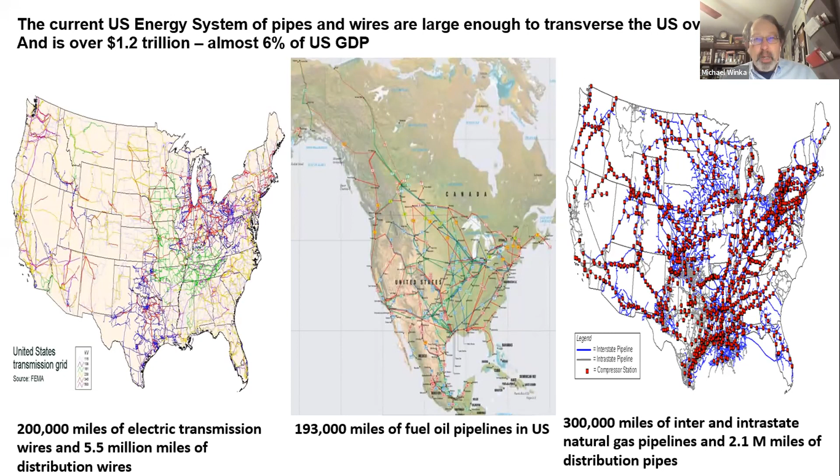So most people think when you're talking about an industry that size, that has so much inertia and resistance to change, that only government and only industry can affect that change. And yes, governments can do a lot. They can set the policy, they can set the incentives. Industry can go out and build those large clean energy power plants. Governments can permit them, and industries can develop those power plants.

But there is a real partnership that has to happen between you as the consumer and user of these levers and government. The more of these levers you pick up and use, the more the ability of the government to accelerate those policy levers. And I'll give you an example of how that happens.

The Renewable Portfolio Standard, when the RPS came into place in 2000, was 0.25%, and it increased to 4% by 2012. BPU in 2003 doubled that, and then in 2006, by regulation, it increased it to 20%. And then the legislature came along and increased it to 50% by 2030. That's because people were using clean, green energy and the RPS, and the government was then able to extend that policy. That's how these things happen in partnership.

So you have to pick up these levers. I'm not saying that you have to run faster to solve all these greenhouse gas mitigation issues, but it is this partnership and this give and take between government and consumers.

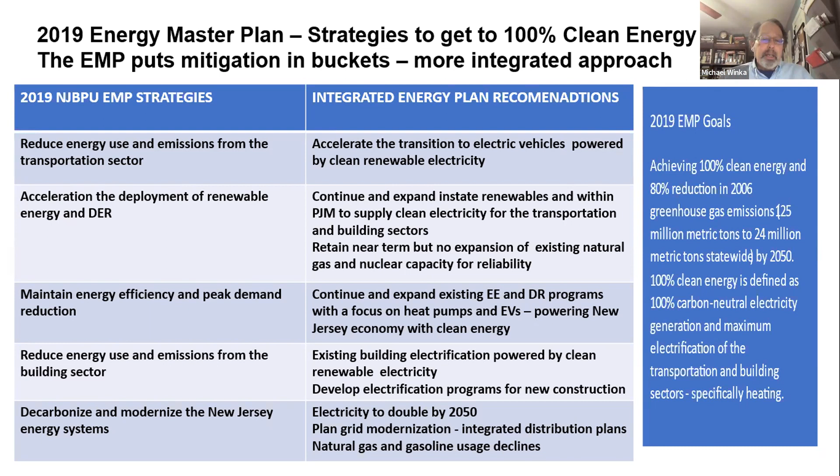The integrated energy plan structure is to say, we're going to reduce our emissions from the transportation sector by advancing electric vehicles powered by clean renewable energy. We're going to reduce our emissions from the building sector by electrifying buildings powered by clean renewable energy. We're going to increase renewable energy so we can power the transportation and building sectors. And we're going to decarbonize and modernize the grid by increasing and doubling the electricity and reducing natural gas and gasoline. So it's that integration of those strategies that really is at play here.

And you can see this in the summary of the recommendations of the modeling by the Rocky Mountain Institute in the Energy Master Plan. You can get to those goals that are set in the Energy Master Plan of about 100% clean energy and 80% reduction by 2050 with existing technologies. You can do that at a relatively small cost. There is a cost, but that's offset by significant benefits across the board.

The existing policies that are in place, those existing policies are in the Clean Energy Act of 2018, will get you to a good start, but you're going to have to advance those policies as you go along to get to the goals in the Energy Master Plan. And that least cost energy system that you build out by 2050 is going to look substantially different than the energy system that you have today.

And that's really the resistance that you're seeing. If you could put an end of the pipe technology on for greenhouse gases, you wouldn't have climate deniers. It is that inertia to this big change in the energy system that is driving all of these other issues on the other side. So when you apply those strategies across those sectors, you can see in the DEP Global Warming Response Act, they reduce all of those emissions across those sectors.

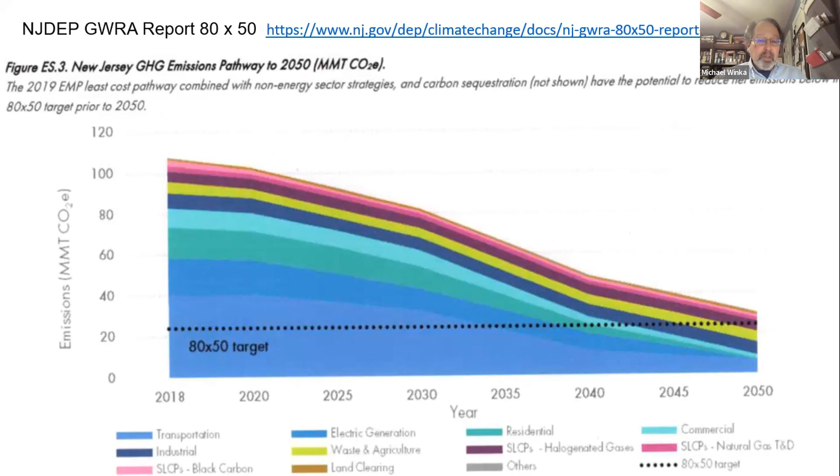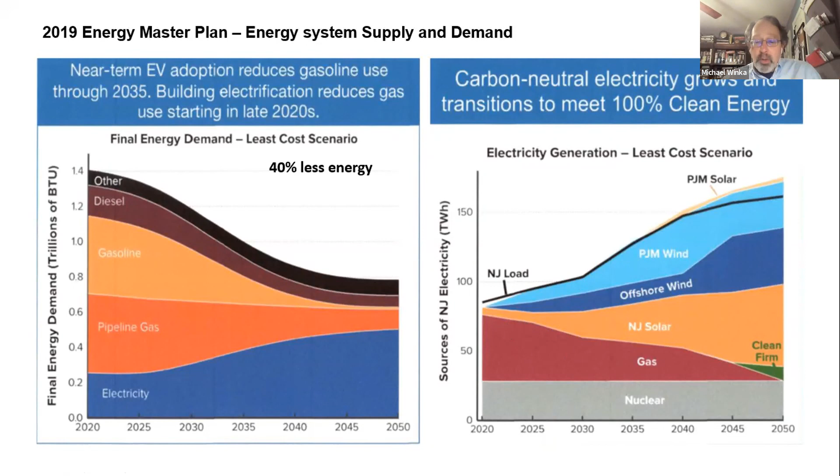But today, 50 to 60% of our electricity is generated by natural gas, 40 to 50% by nuclear. And that all depends on the time of the year and the cost over the time of the year, and about 10% by renewable. So if we're increasing strategies like building sector electrification and EVs and increasing the amount of electricity today, we're actually increasing the demand for natural gas unless we're doing that in an integrated fashion with clean, renewable electricity. So if you increase the demand for natural gas, you're just increasing the demand for somebody to come in and put in a pipeline and build another natural gas combined cycle, unless you do this in an integrated fashion.

And to look at this in terms of cost, if you look at the reference case that goes along, to meet those emissions in the Energy Master Plan is only a 0.2% increase over business as usual in energy GDP. That's a relatively small increase, and probably you go to any economist, you're not going to see a 0.2% increase in GDP affect the economy.

And in any cost benefit ratio, when you have a cost benefit greater than 1, that's cost effective, and you're going to implement those strategies. So that's the 2019 Energy Master Plan, getting to 80% reduction by 2050 and 100% clean energy. I'm going to talk a little bit about how you can look at that roadmap to get to 50% reduction by 2030. So to get to 50% reduction, you need to get to 64 million metric tons from where we were at 97 million metric tons.

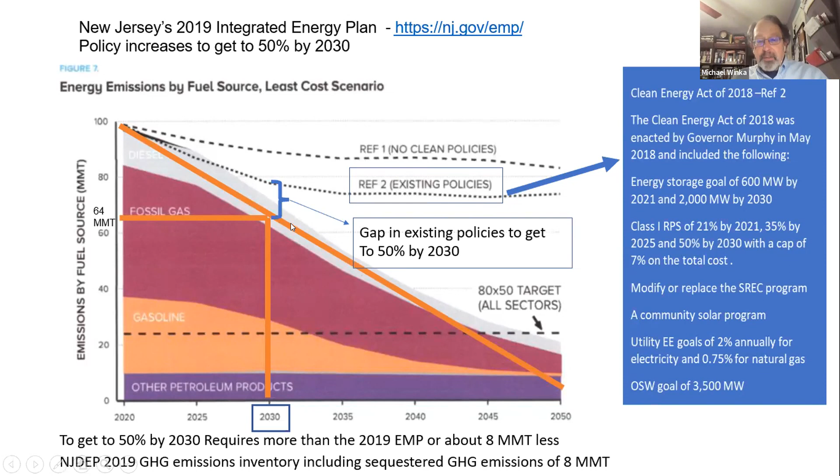But if you increase those policies to get to 50% by 2030, that's about an 8 million metric ton increase in reductions that you have to get. So it's not a big stretch to get to 50% by 2030. And here you can see this a little better in terms of the energy uses and the building sectors. You have to go from 97 million metric tons to 64 million metric tons. That's a 33 million metric ton reduction.

If you just replace the electricity with clean, renewable electricity, you only get 17 million metric tons. That's half. You have to do something in the transportation sector. You have to have half of the cars on the road, 3.5 million electric vehicles on the road, along with reducing all of that electricity to clean electricity. And those two things aren't going to happen by 2030. And you have to pick up this third lever.

These three things have to happen coordinated and integrated across the board. You have to electrify the building sectors, you have to electrify transportation, and you have to do that with clean renewable energy. And you see that in the same structure on the household side. It's just repeated what you see on the larger statewide side.

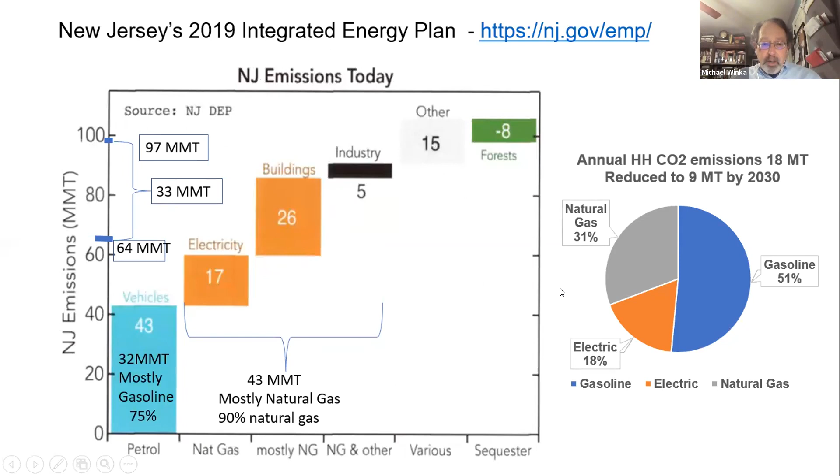So I know folks are looking for the Build Back Better plan to be passed, and folks are disappointed there's not going to be a federal carbon tax. But there are 24 states with New Jersey that have action plans to say, I'm going to get to 100% clean energy. I'm going to get to 80% by 2050. I'm going to get to carbon neutral. I'm going to get to zero, or I'm going to get to 50% by 2030. 24 states, including New Jersey, are half the states in the country.

And they don't depend on a federal carbon tax. They don't depend on a federal clean electricity standard. It would be nice to have. It would help to accelerate this. But there are greenhouse gas emission technologies that are currently available that are going to get us to that goal, even without a carbon tax. And the reason I say that is you can look at this slide. It's a little busy slide. I'll go through it in a little bit of detail, but not much.

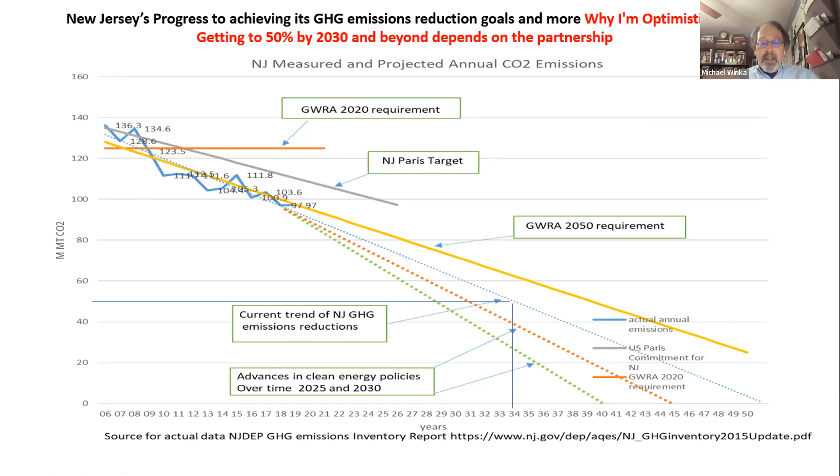And they're the same people that can't see the market forces that are changing us to clean renewable energy and electric vehicles and electric heat pumps. We are on this economic pathway and nothing is going to stop that. And I'll show you why I think that. I'm gonna pass up these two slides just to be able to get to these last couple of slides in some reasonable time. And the good thing about you picking up these levers, they're all incremental. You don't have to do everything all at once, and not everybody has to do everything all at once.

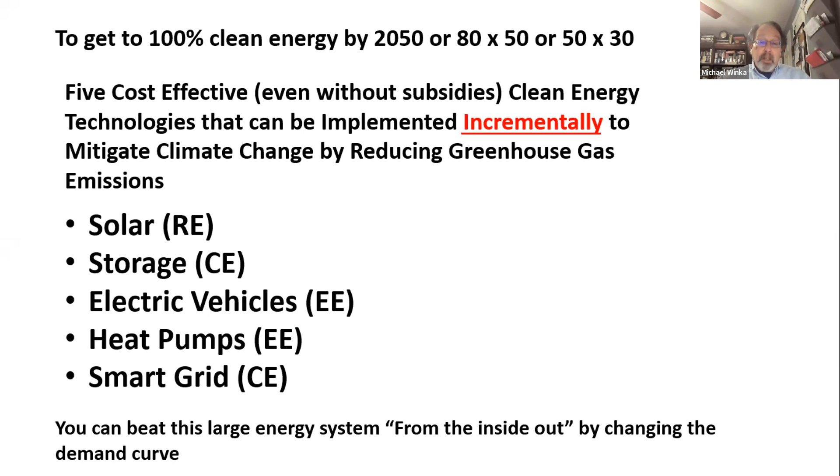Let me just take you through two technologies. To reduce transportation emissions, we're going to move to electric vehicles. Now, you can go buy a Tesla for $60,000, $70,000, but there are plenty of used electric vehicles for under $20,000. And just take a round trip mileage, because you have to set a mileage. So in this example, it's 40 miles round trip, 5 days a week. The average internal combustion engine will use over 400 gallons of gasoline. That represents 48 million BTUs of energy and costs around $1,400 a year. That same trip by an average electric vehicle only uses 3,500 kilowatt hours, a quarter of the energy, 12 million BTUs, and about a third of the cost. That's the economics that are driving this.

And because of that energy reduction, you're avoiding almost 3 tons of CO2 in your household carbon footprint. That's good, but remember, if we're increasing electricity, we're increasing natural gas demand. So better is if you can access 3 kW of solar, in this case, either put solar on your roof or buy into a community solar project, you can drive your electric vehicle on your own clean, renewable electricity. Now, that has a 15-year simple payback, and nobody's going to hold a 5-year old car for another 15 years.

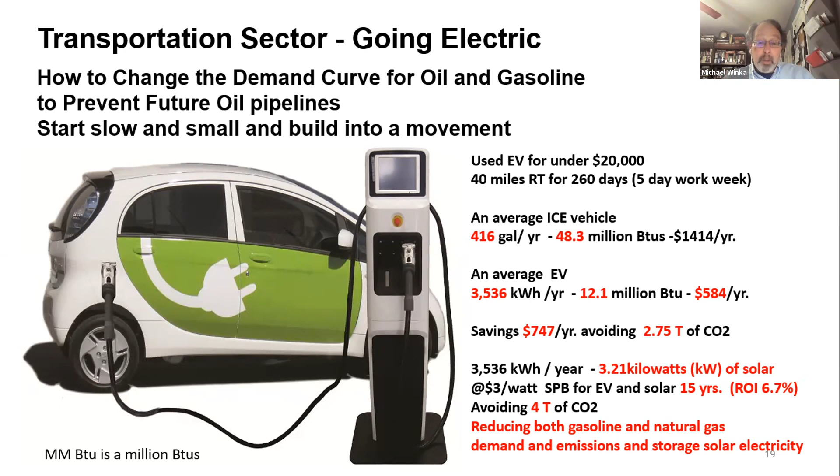That's a key. One of the big drawbacks that I hear about electric vehicles is they don't pay road tax. But you could double the road tax on an electric vehicle and still save money. You could quadruple the road tax. We can have public transportation across the base and still have an electric vehicle save money over an internal combustion engine. And again, all of this stuff is incremental. You don't have to change out an entire house. You can change it out by zones. You can do a hybrid system. You'll hear about a hybrid system.

In this example, we're comparing a high efficiency gas hot water heater to a heat pump hot water heater. Now, the heat pump hot water heater costs twice as much. The operating costs are about the same, but in terms of energy use, it's about 1/3 of the energy use of the gas water heater. And because of that, you're avoiding 2 tons of CO2 emissions on your household carbon footprint. If you tie that together, again, with 1.5 kW of solar on your roof or a community solar project, you actually can power your electric heat pump with your own renewable electricity. And that payback period is 10 years. An electric heat pump is going to last 15 years.

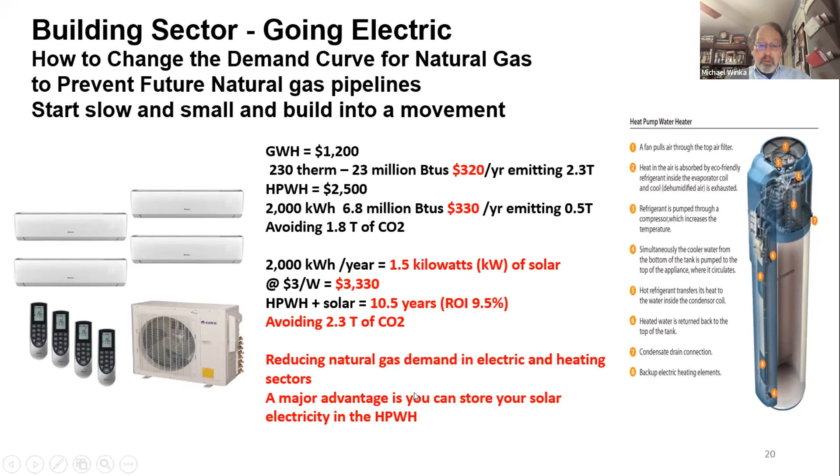Your solar system is going to last for 25 years. So you're going to get 5 years of free renewable electricity to power your hot water. You're going to reduce your natural gas demand. You're going to reduce your heating sector demand, and you're going to be able to store some of your solar electricity in your hot water heater.

So that's my presentation. I'm feeling pretty optimistic. I don't know about you, but I'm feeling that we can get to 50% by 2030 with relative ease.

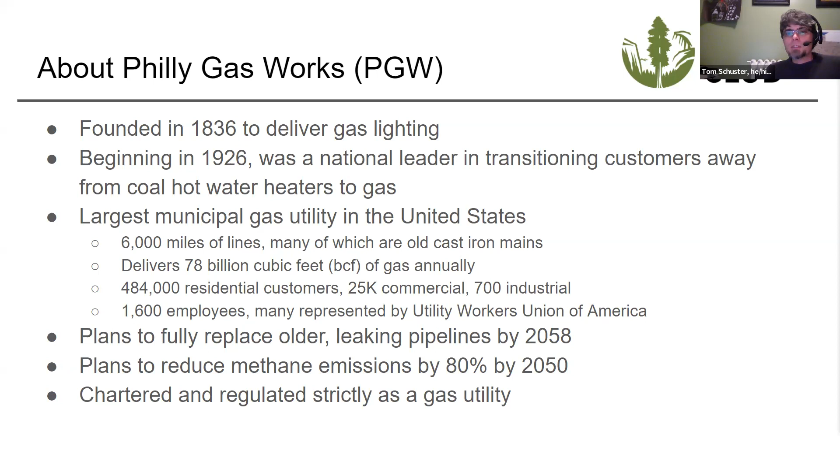In contrast to that, the city actually passed a Ready for 100 resolution a couple of years ago, one of the largest cities in the country to do so. And that resolution includes community-wide 100% clean energy for all uses. So that includes building heat, transportation, and electricity. The utility has not taken any major steps in that direction, except for this diversification study, which I'm going to walk through a little bit of the findings of.

And we were hoping when we got involved in a rate case for the utility earlier this year that we could leverage the Ready for 100 resolution and the knowledge that it is city policy to decarbonize, to hopefully negotiate a settlement that starts to recognize that and force a plan by the utility to phase out some of its distribution system, or at least stop expanding it. We didn't get very far with that at all with the Public Utility Commission.

We were able to knock down the rate increase somewhat, but they are continuing with their plan to replace all their lines with equipment that is supposed to last 30 plus years, even though we know that in 30 years, if we're to address the climate crisis, they won't be using them anymore. So we have our work cut out for us there. This is the inertia that Mike was talking about in his presentation.

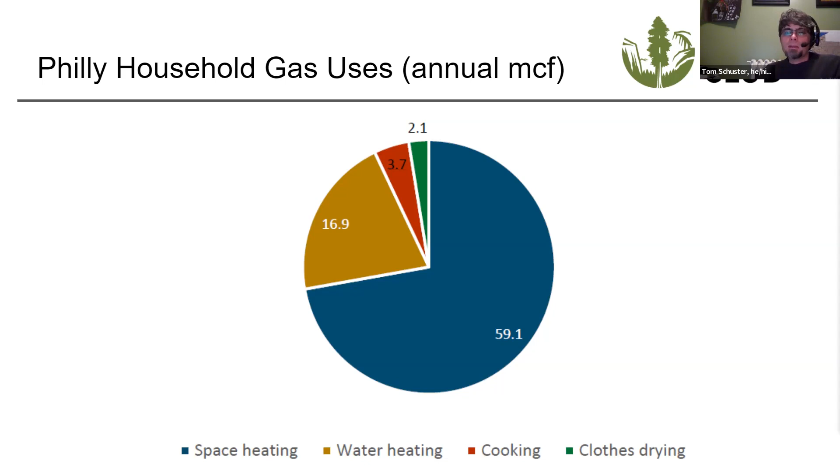But it also is a source of a really scandalous amount of indoor air pollution. There's just been an utter failure of the building codes to regulate indoor air pollution from gas stoves specifically, even though they've recognized that other gas appliances like furnaces and water heaters have to be very well vented. So that's just a real big picture view of the end uses.

And then one of the important findings, I think for advocacy purposes, of this diversification study is that electrification right now is a no regrets solution for climate. Even given the fact that there's still a lot of coal and gas in the PJM electricity mix, when you are converting the typical house from gas heat to an air source heat pump, you are going to cut your annual greenhouse gas emissions on average in half. Even in the most extreme cases, you're still going to be saving some. And so there's really no reason from a climate perspective we shouldn't start this transition immediately.

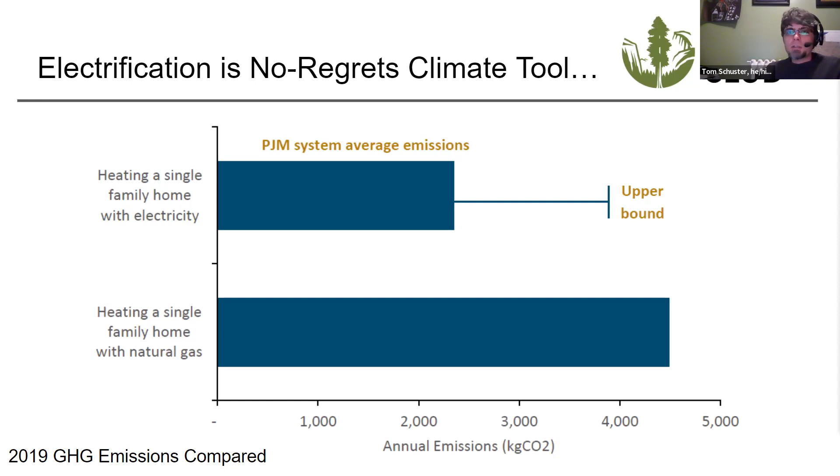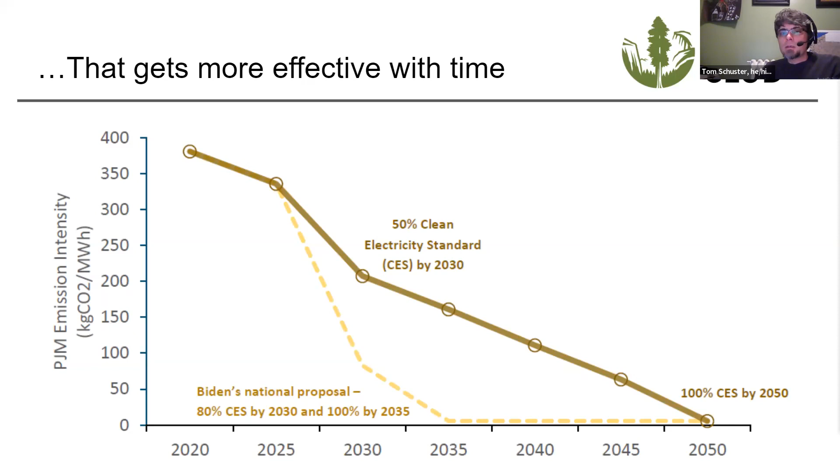And as you all know, in New Jersey, with your fairly aggressive, at least compared to Pennsylvania, RPS and plans for offshore wind development, this is getting to be a better and more effective climate tool over time as the amount of clean energy increases and the gas and coal comes offline. And this is a couple of different projections. And unfortunately, the 80% CES by 2030 is not part of Build Back Better anymore. So we're unlikely to see that trajectory, barring some kind of miracle, but we are still on a steady downward trend across the entire grid.

So what did the diversification study look at? There were 4 main scenarios, one of which is called decarbonized gas. A lot of gas utilities are enamored with this idea because in theory, you could just replace the product that they pump through their pipelines and into homes with something that supposedly has zero carbon footprint. It could be produced through things like anaerobic digestion. It could be green hydrogen. It could be some sort of synthetic natural gas. They inject that into the pipeline, they ramp up the percentages of that over time, and they pretty much can continue as the same type of company they are now. We'll get into whether or not that's a fantasy in a bit.

Another scenario on the bottom is full electrification of houses, using primarily air source heat pumps in this case, because I think it's generally considered in a dense urban environment like this that air source heat pumps are going to be more practical than ground source.

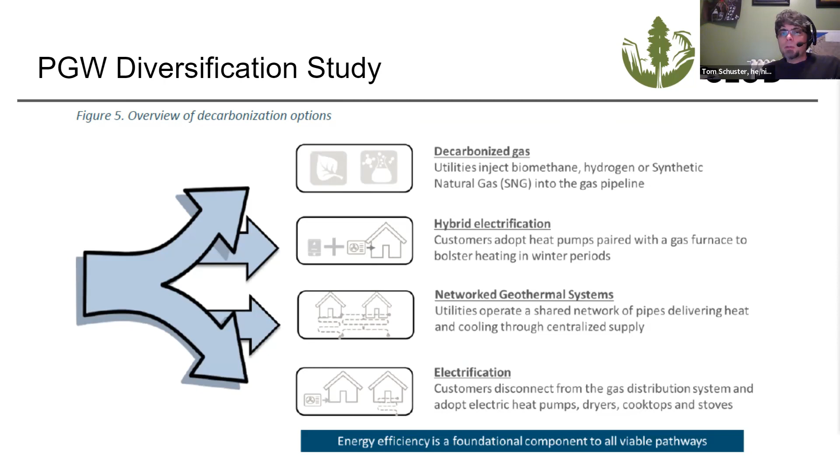And then there was this hybrid electrification scheme where everyone adds air source heat pumps, but to deal with the concern that you would have significant spikes in electricity demand during very cold weather, they would maintain the gas infrastructure to act as a backup during those times of peak demand. So those were the four main scenarios they looked at. And actually, they didn't look at network geothermal by itself. They looked at it as a supplement to a hybrid electric or a full electric system.

So the first thing they dealt with was projecting the cost of decarbonized gas, and it's not pretty.

You can see that according to this slide, the cost ramps up over time, multiplies by a factor of about 10. And that's less the fact that the gas itself is getting more expensive and more the fact that they're using more and more of it over time.

There are a few scenarios that are realistic that find that this is easy to come by or easy to produce. And from an environmental perspective, we're very concerned that you would still have the leakage problem of methane, especially if you're using biogas. You'd still have to maintain a very tight system, and it's unlikely that you would be able to, even if you were to reduce the upstream carbon emissions of biogas to zero, which is doubtful.

But if you were able to do that, you'd still have to deal with this leakage problem of the product itself. And so this, and you'll be able to see in a couple of slides going forward, this really does kind of kill the possibility of just substituting decarbonized gas and not doing anything else.

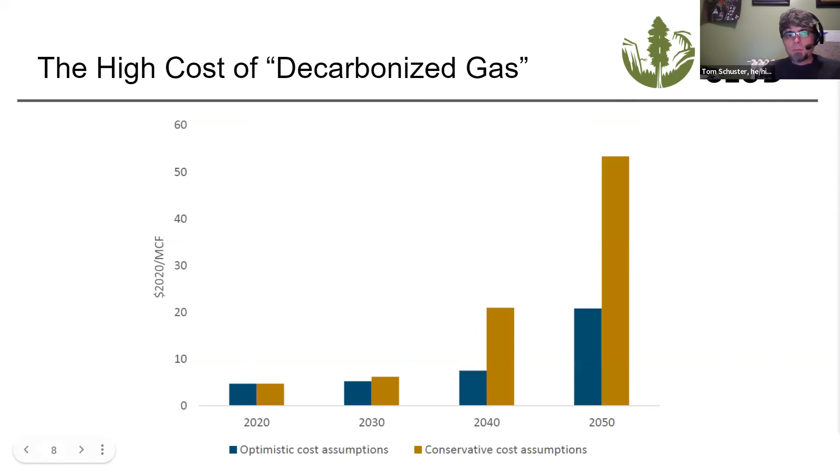But we do have this kind of split between participants and non-participants in terms of electrification. And the reason for that is because PGW makes most of its revenue through volumetric gas charges. If people are coming off the system, there are fewer customers, there's less gas being sold, and that means that the remaining customers have to foot more of the bill. And then this issue does compound over time to the point where those non-participant costs in 2050 are really kind of off the charts, because it's really just a handful of people supporting much of the system.

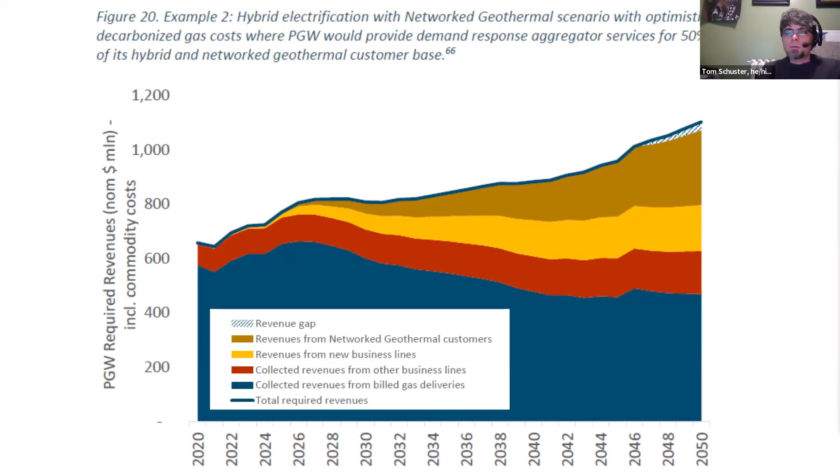So the study recommended 3 pilots, and that was something that a lot of the advocates were very interested in trying to figure out so that we can work on implementing. We're kind of disappointed, honestly, with 2 of them. The localized decarbonized gas program, we don't have a lot of faith in, although they are at least talking about converting city-generated waste, like sewage sludge and things like that, and green waste into biomethane. So it's trying to close some waste loops a little bit, but at the end of the day, I don't think it's really very scalable or particularly cost effective.

The weatherization programs for low and moderate income customers with things like on-bill financing, because of the way rates are structured in Pennsylvania, that's actually unlikely to save them much money. And so some of our low-income advocate partners are concerned about whether or not that's going to be an equitable solution, even though I think it's well-intentioned.

The one that we're really excited about is that they did see a lot of value in this network geothermal, and they're going to do a more extensive feasibility study on this. They're not moving quite as fast as we would want them to, but the utility, this is one area where PGW actually is excited about a transition because they think that they can use a lot of their existing right-of-way and retain a lot of their employees with similar skill sets because they'd still have to maintain a network of pipes. They'd just be piping hot or chilled coolant through these pipes instead of gas. So I think that's seen as somewhat of a win-win, but there needs to be a lot more study because it's not really done on a large scale anywhere right now.

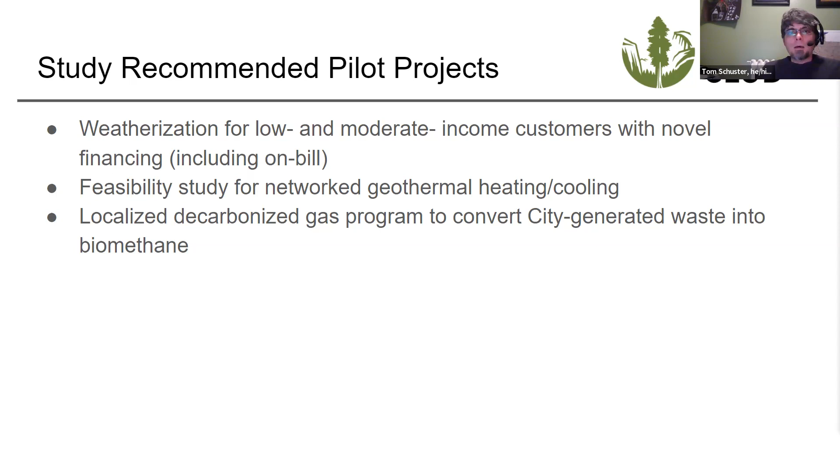And just a quick slide on next steps. We think because of the results of this study, because it's not particularly ambitious, we're going to have our work cut out for us from an advocacy perspective. We're in the process of really trying to organize and build up a new coalition called Here for CJ, which is looking to holistically address issues of home repair and weatherization, electrification for low and moderate income homeowners and renters in Philadelphia, and address some longstanding housing inequalities. And also just really ramping up our efforts with the city to put their money where their mouth is with respect to the 100% clean resolution.

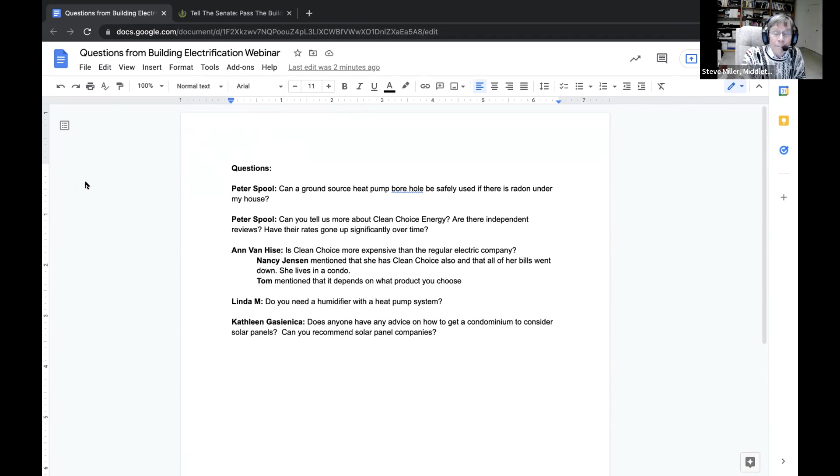Steve, there are a number of questions about the third-party electric. Yeah, I've been tracking third-party supplier prices for about 5 years, and in fact, using the lowest price supplier. I maintain a website of my findings, and I put the website URL in chat. So if you wanted to know what the choices are and what their prices are, take a look. Typically, I've paid 10% less than JCP&L prices.

However, in the last 3 months, there was a dramatic price increase of renewable. I hope it's temporary. I expect it is. And so I would propose that if you wanted to go with renewable, you could use this table that I maintain, but wait a few months till the prices come down and then buy a 2 or 3 year contract.

But I wanted to point out that the first page of my electric.smiller.org shows that instead of going to a third party supplier, it's probably better to use your own electric, like solar on your rooftop. Or buy into community solar, or buy from a third-party supplier who is local. If not local, then maybe PJM territory. So those are all considerations. I talk about that in that website.

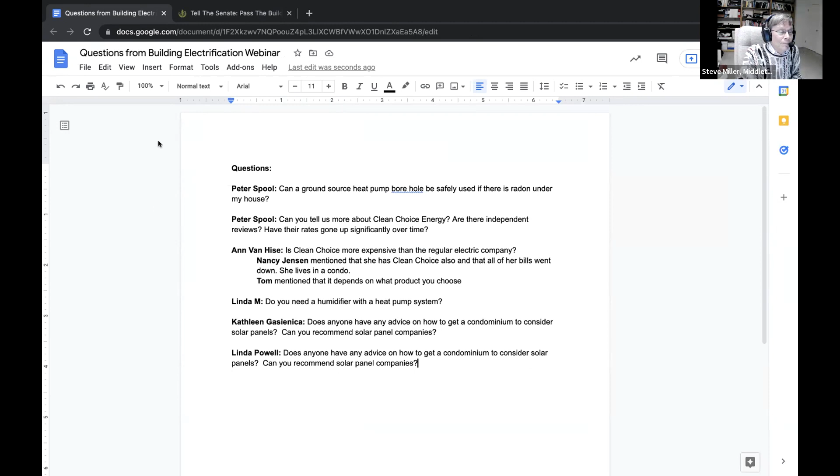Yeah. If you put solar on your roof, given the avoided costs that you have and the capital cost now, you probably can get it for $2 a watt, $2,000 a kW installed.

The typical house is about 7 kW. You're going to get a return on your investment of about 10%. Simple payback period is somewhere between 7 to 10 years. And the system lasts 25 years, although the efficiency decreases.

Yeah, and you're talking about panels with efficiencies of about 20% now. So it's pretty cost effective at this point in time, even with the lower, what are they called, SUSI SRECs now that are out there at $90 a megawatt hour. So pretty cost effective.

Okay, and then I think Linda had a question. Linda M, do you need a humidifier with a heat pump system? Well, it's not conditioned air. Well, so, anytime you're adding heat into the system, you're driving off some moisture in your house. I'm not the expert on the humidity factor. Maybe David knows, but you're putting heat into a system in your house, so you're driving off the moisture.

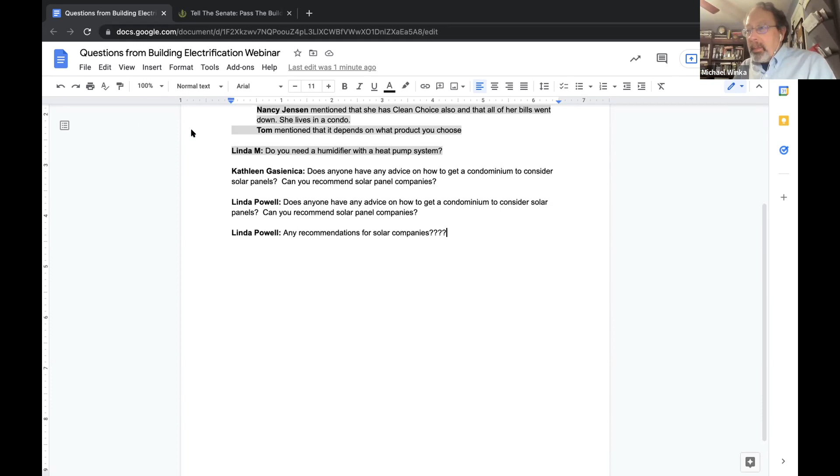And then Kathleen had a question. Does anyone have any advice on how to get a condominium to consider solar panels? And also Linda and Kathleen both asked for recommendations for solar panel companies. Well, so maybe Steve has some recommendations, but there is a website that was started by DOE. It's called Sage. They sort of review the contractor's history. So you have to be vetted to get onto the system. And typically you put in your zip code and you get 3 or 4 of these vetted contractors that come out to you.

On the condominium side, there is a law on the books that condominiums can't refuse, but they can manage that system. I can go back and look and see if I can find the law and where it is, but it's a hard one to get across in a condominium association. Yeah, Sage is recommended by green teams, by the way. One of the green team projects is solarification for cities, and Sage is recommended to get a very quick quote from a number of companies at the same time, and you can compare the quotes.

And I had actually written down the wrong question for Linda, so now I have the correct one. It is, would ground heat pumps be problematic if you are near a stream? That should be irrelevant, yeah. Because you can have geothermal loops that either go vertical or horizontal. Cornell University has huge geothermal loops in their lake. So they don't contaminate water or anything like that. So that should be non-problematic. Right. And that is all the questions that we had in the chat.